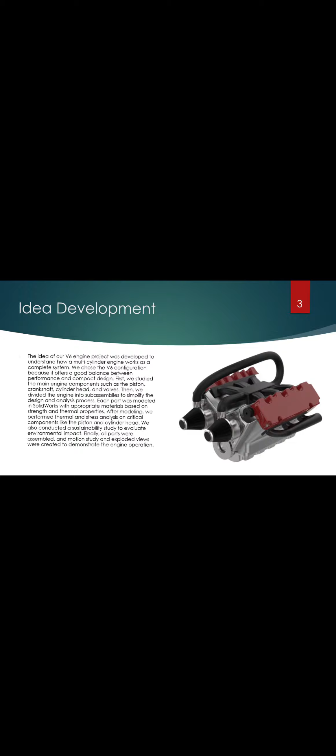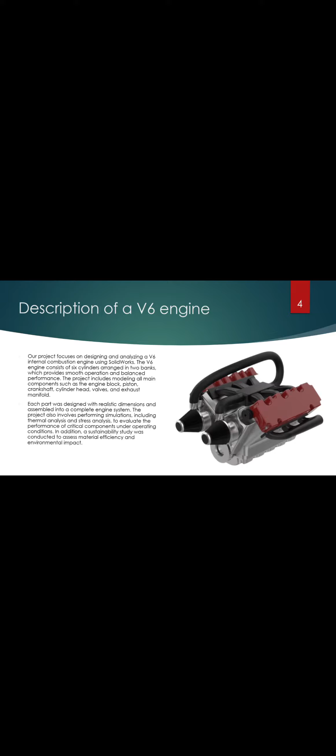The project includes modeling all main components such as the engine block, piston, crankshaft, cylinder head, valves, and exhaust manifold. Each part was designed with realistic dimensions and assembled into a complete engine system. The project also involves performing simulations including thermal analysis and stress analysis to evaluate the performance of critical components under operating conditions. In addition, a sustainability study was conducted to assess material efficiency and environmental impact.

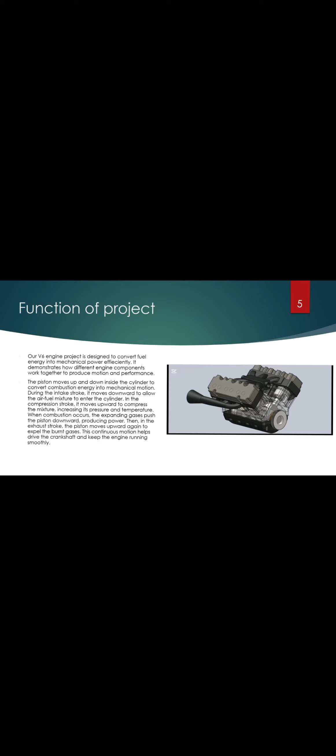And now for the function of the project. Our V6 engine project is designed to convert fuel energy into mechanical power efficiently. It demonstrates how different engine components work together to produce motion and performance.

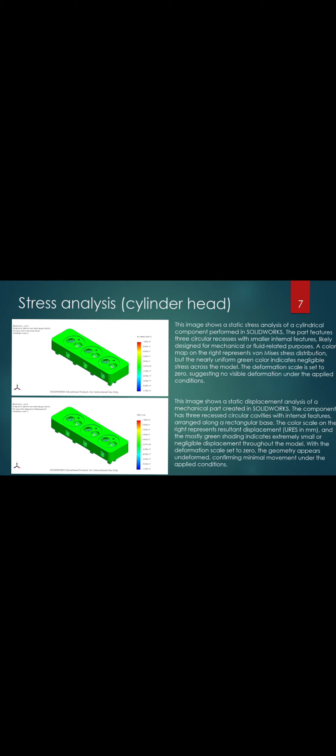Well, here is the stress analysis of the cylinder head. The image shows a static stress analysis of a cylindrical component performed in SolidWorks, and the deformation scale is set to 0, suggesting no visible deformation under the applied conditions.

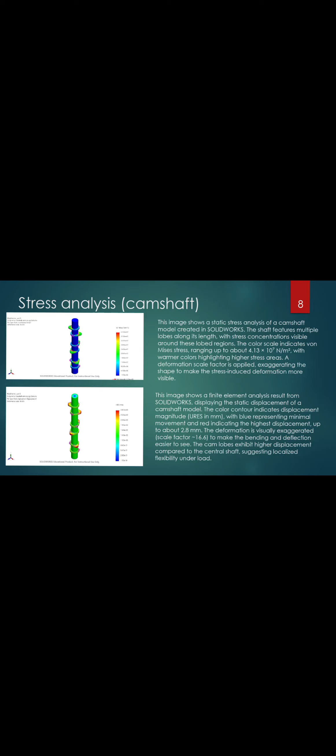Well, here is the camshaft. This image shows a static stress analysis of a camshaft model, and the deformation scale factor is applied, exaggerating the shape to make the stress-induced deformation more visible.

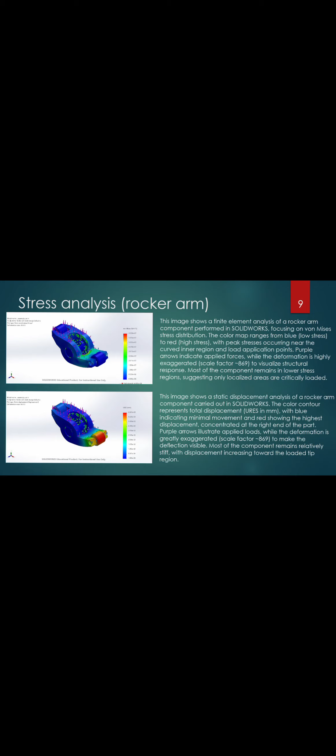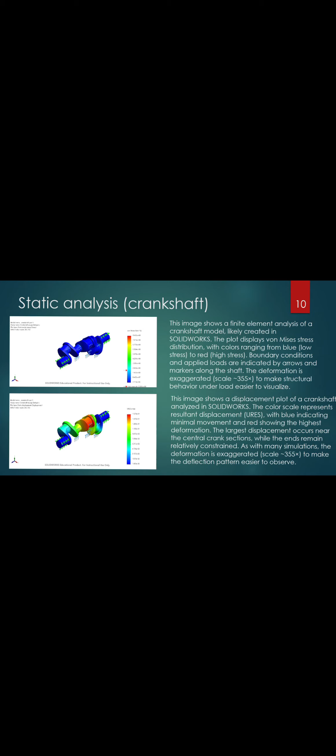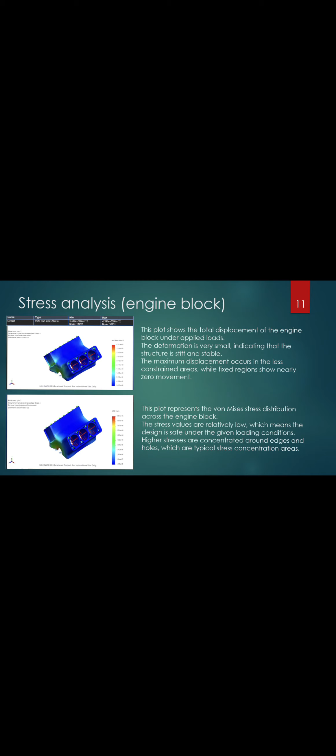And now for the engine block. This plot shows the total displacement of the engine block under applied loads. The maximum displacement occurs in the less constrained areas, while fixed regions show nearly zero movement.

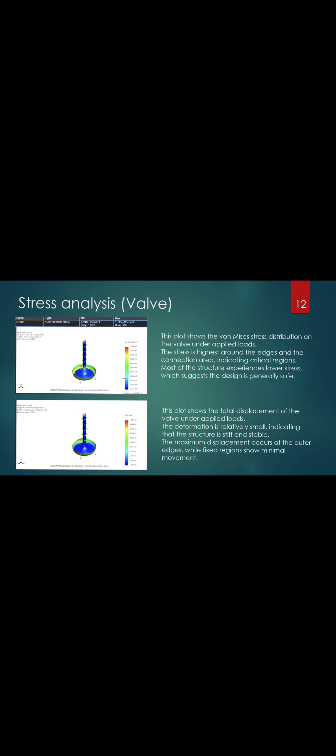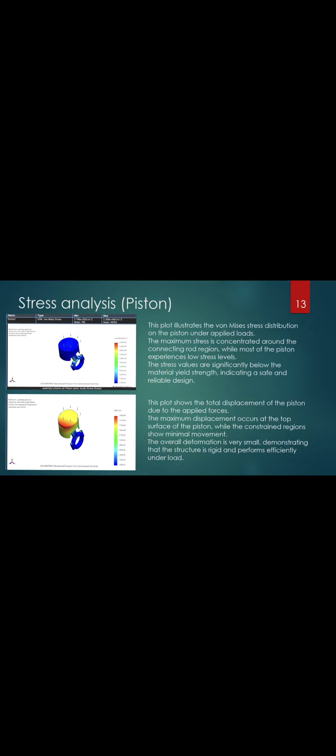And now for the project evaluation. This project demonstrates the successful design and assembly of a V6 turbocharged engine using SolidWorks, highlighting key principles of mechanical design, component integration, and motion simulation. Throughout this project, challenges such as component alignment, dimensional accuracy, and realistic assembly constraints were addressed. The final model reflects both functional understanding and attention to engineering detail.